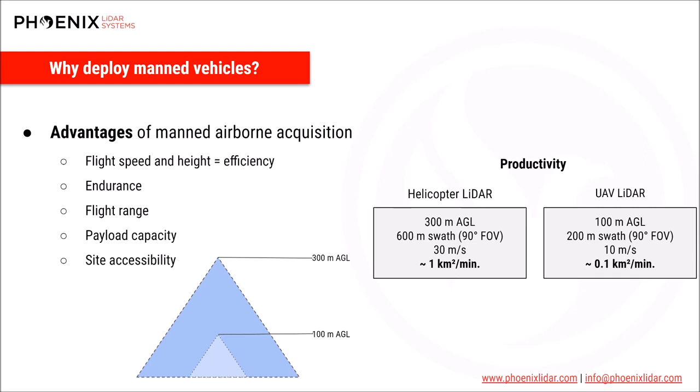But we also need to realize that there's an increased operational cost, and that creates a type of a risk versus reward situation that we need to feel confident about. Acquiring the correct data on your first try is increasingly important when the cost to perform a refly goes up. And because of this, there are some special considerations when planning for data acquisition. These considerations aren't necessarily unique to manned acquisition, but in some cases, they're more significant for this particular application.

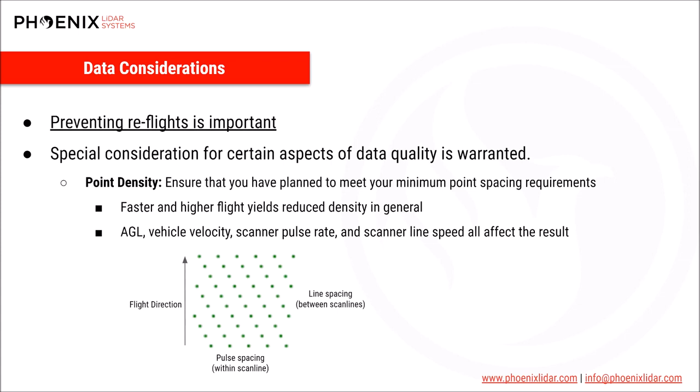First of all, there's point density, and this is a standard project spec that frankly needs to be met. Often it only really becomes a serious planning consideration when we're flying at manned vehicle AGLs or speeds. From a UAS, for example, the data is often so dense that we don't even think about point spacing as an obstacle. And that's not the case when you're flying hundreds of meters above the ground. Collecting with improper settings from these survey speeds and heights could easily result in the need to remobilize and redo a project. And that's definitely something that we don't want to happen.

Other considerations include range capability. When scanning at longer distances, we must ensure that the pulse energy is great enough to measure its target. So users need to be aware of the settings they're choosing, like pulse repetition rate, and check that they're compatible with the intended measurement distances.

Maintaining proper overlap for LiDAR and imagery is another aspect of well-planned data acquisition. As a vehicle travels across areas of significant terrain relief, the footprint and resolution of your acquired data can change dramatically. This can cause two issues. Either number one, you're suddenly too high above the target and not capturing the proper resolution, or number two, you're too near the target and your forward and side overlap are minimized below what you were intending. Usually a terrain following flight path can mitigate this type of obstacle.

Finally, when the time of flight for a LiDAR pulse is greater than the time between consecutive pulses, there can be multiple shots in the air simultaneously. This can cause an ambiguity as to which emitted pulse the return belongs to.

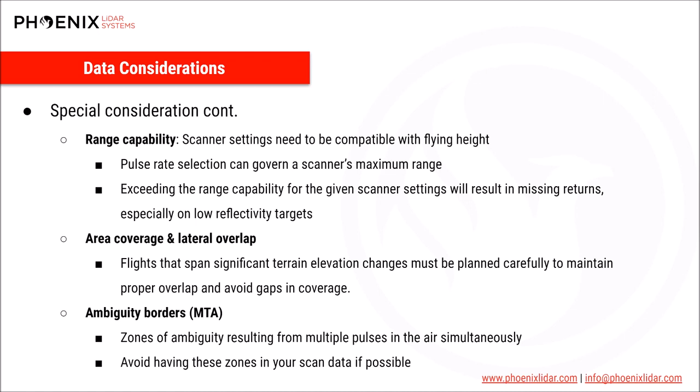Keeping in mind that there are multiple data quality considerations that are an important aspect of a successfully executed acquisition, it's clear that a well-designed flight plan is a critical piece of the overall mission. So next, let's take a look at the process of creating a flight plan.

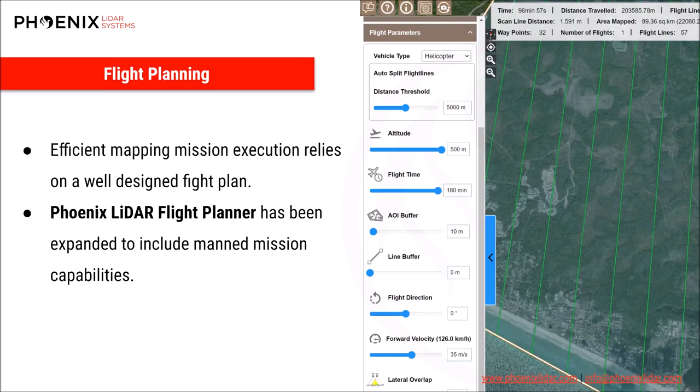Current users of Phoenix systems have had access to our UAV flight planner for a few years. Now that flight planner has been expanded to include options that are useful for missions from a variety of vehicles. We're pretty excited to offer this homegrown option, so let's dive into the key functionality. Oops.

The PLS flight planner has 3 different mission type modes that are applicable for different scenarios. First, we have the wide area mapping mode. This mode is not new to Flight Planner, but there have been some alterations that are conducive to following discrete lines instead of the waypoint following UAV-oriented output that previously existed.

Then there's the corridor mapping mode, which is useful for planning linear areas of interest like utility corridors, for example. And finally, a new type, which is line points mode. This is used for planning complex paths like boresight calibration patterns.

These missions can be built using imported KML areas of interest, or they can be built from AOIs that are digitized directly in the flight planner. We've also added the ability to save missions to our server and to have multiple missions, possibly of varying types, even open in a single project. So for example, if you plan a wide area acquisition and also want to perform calibration during the same flight, that's pretty easily achieved.

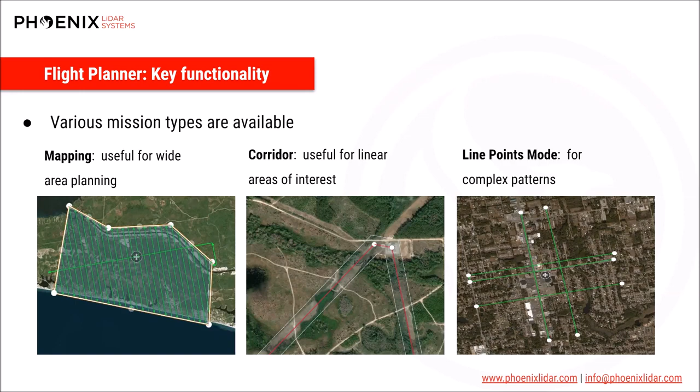In order to plan appropriately, the flight planner has a variety of sensor types that can be added to a mission and specific sensor models that are available. So you can plan a mission that includes a LiDAR plus a camera or plus multiple cameras at the same time. With the specific sensor models, we can choose which settings to use, and the flight plan output will be estimated based on those settings. This sensor-specific criteria allows accurate planning for key aspects like density, overlap, resolution, etc.

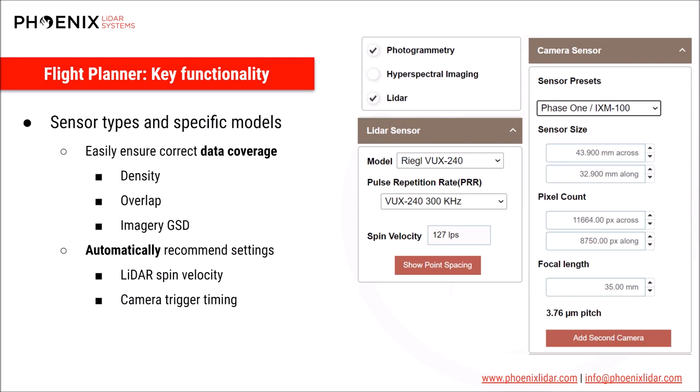The parameters which control how your flight plan will be automatically designed are very visible and they're in your control. Toggling these is quick, and so you can easily fine-tune things to reach your desired outcome. There are some straightforward parameters like, for example, would you like to terrain follow or not? What speed and altitude would you like to use? What's your usable field of view, etc. These are the more foundational settings.

There are also some ways to customize for efficiency and quality, like setting flight direction to best suit your AOI, or to create north-south only passes to optimize image quality based on illumination conditions.

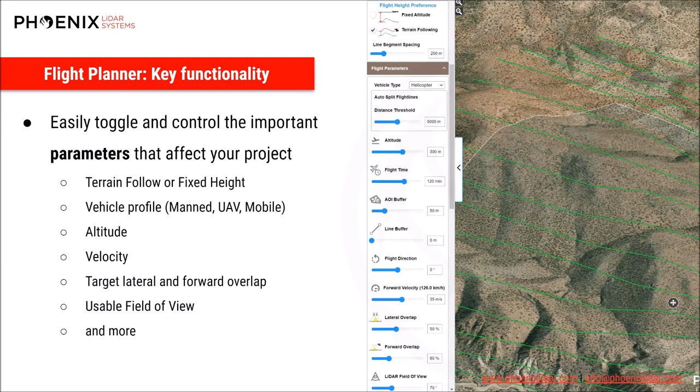Once your parameters are set, the flight plan can give both visual and statistical results for your quality control. The visual results are various map layers, including generated flight lines, point density estimates, MTA zone borders, image resolution, and other clues to help you know if the plan is what you need.

The statistical output will show you interesting properties of the LiDAR like point spacing and swath widths. You'll get estimates of camera output, and you'll also get properties of the flight itself, such as duration, distance traveled, and line spacing.

If adjustments are needed, you just toggle the previously discussed parameters or make changes to the scanner settings and recompute the plan. Really, the purpose of these visual and statistical results is to ensure that you have the right plan for a successful mission.

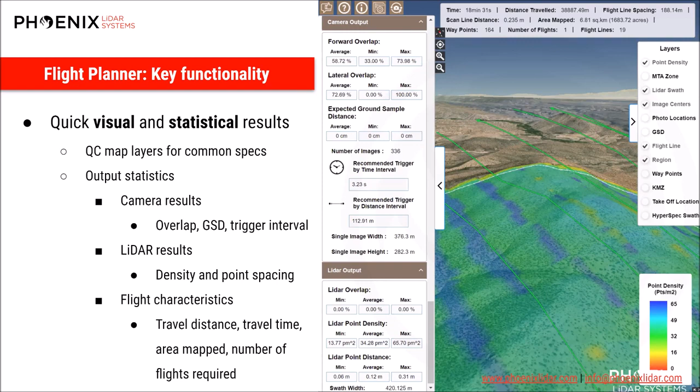The final step is to output your results. There are outputs that are compatible with a few different flight controllers. The one that we're particularly interested in for manned aerial acquisition is the Spatial Explorer output. This will generate a plan that can be used directly in the new real-time mission guidance functionality of SE. So let's move into that section of the webinar as I hand the mic over to Ben.

Thank you, Conrad. Can you hear me? Loud and clear. Cool.

Yeah, so now that we know why we would create a flight plan and how to create it, I'd like to show you how to use that in the field. And I thought to introduce mission guidance, which is the new part of Spatial Explorer, a 15-minute demo would be much more helpful than slides. So let me try and share my screen here and demonstrate this. 1 second.

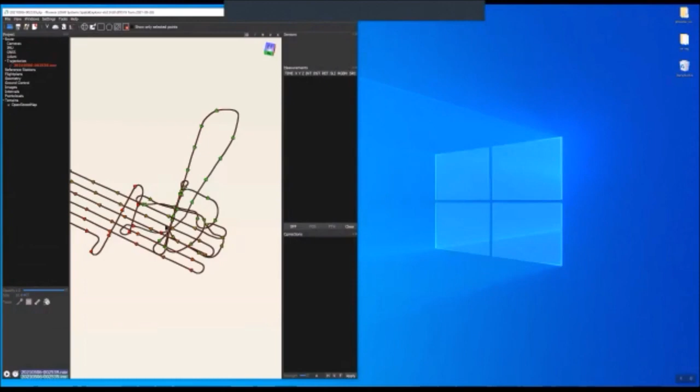Now, this flight was flown in an R44, and you can see here we're taking off, gaining some height, then we're moving over to a calibration pattern here. So there's some lines flown here at 2 different altitudes, and then we're moving over to a mapping pattern. And if we zoom out a bit, we can see that this was flown just north of Austin at the Georgetown Municipal Airport.

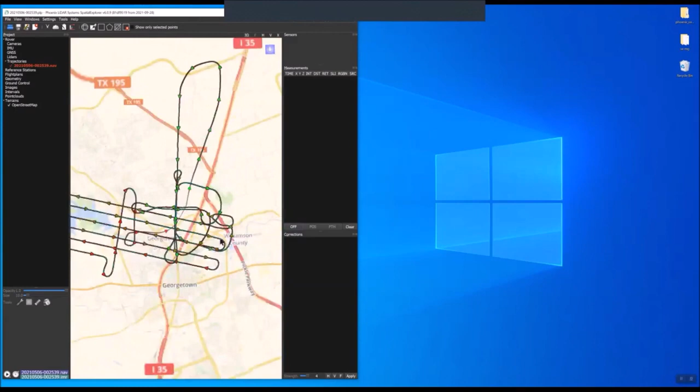And yeah, I want to focus on the mapping part of this. So first of all, I'll start playing this at right around real-time speeds. And because I know the navigation system is going to initialize the first couple of minutes, I'll just jump ahead to maybe a more interesting part. But in the end, once you're connected to rover, even if the navigation system is still, say, aligning or initializing, you can already start mission guidance.

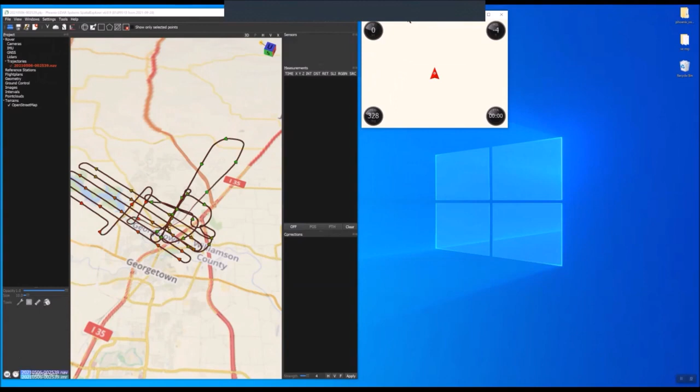And of course, in practice in the field, you would be moving this window to the pilot screen, which would be connected to your laptop via HDMI. So the left side would be for the sensor operator and the right side would be for the pilot. You can already see this is us. Here's the current velocity, our current height above ground, a heading, and an estimate of when the flight plan is complete. Of course, right now we don't have a flight plan loaded, so this is kind of useless right now.

But if we seek ahead here a little bit, we can already see ourselves moving. And what you see here is what we call the dynamic whisker. So this gives you a good idea of your current curvature, and if you keep flying with this curvature, where you're going to end up in the future. Let me close this here and this.

Okay, so the idea, of course, is to fly with a flight plan. So let me load that. This file was created using our Phoenix LiDAR flight planner. So I'll just open that, and really you can just open any KML. All we need to know is, since KML files can have folders, from which folder to import the geometry, and you can select multiple, but really all we want here is the flight lines, and we want to limit this to line strings. So really just paths, not polygons or points, just lines.

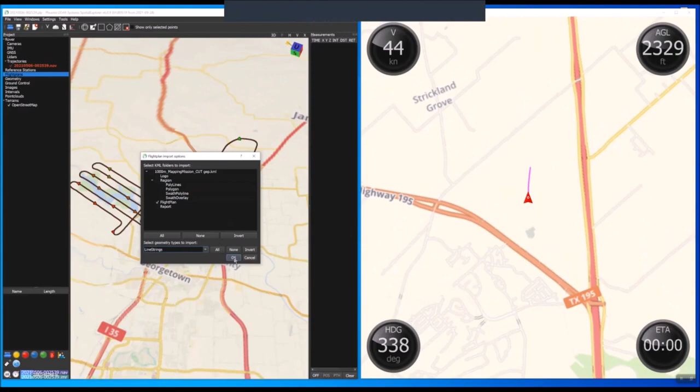So I'll just press OK, and immediately we'll have, in this case, 10 flight lines in here, and they show up in the operator view in 3D, and they also show up here for the pilot. Now, in terms of flight plans, you can load multiple flight plans, which will show up here. And each flight plan consists of any number of flight lines. Flight lines can have a status. Here you can see after loading they're all blue, which means that they are incomplete.

You can schedule a flight line, in which case it'll turn yellow, so you use the yellow button for that. And then that tells the pilot to please approach this flight line because it's going to be mapped next. When the pilot gets close enough to one of the endpoints of it, it'll switch into recording mode, or active mode, which is red. And when the pilot did a good job and passed that line, it'll turn to green. So the idea is that blue will slowly turn to green over time.

Now, before we go there, let's focus on this part here. I would like to draw your attention to this flight plan because it has a couple cosmetic issues here. You can see the flight line not really being very smooth. So it is terrain following, but something is up there.

Now, as you can already see here, Spatial Explorer has a model of ground. And we want to use that to fix up this flight plan. So even though there already is a model of ground, we have some additional flexibility in allowing different height maps to be used for this.

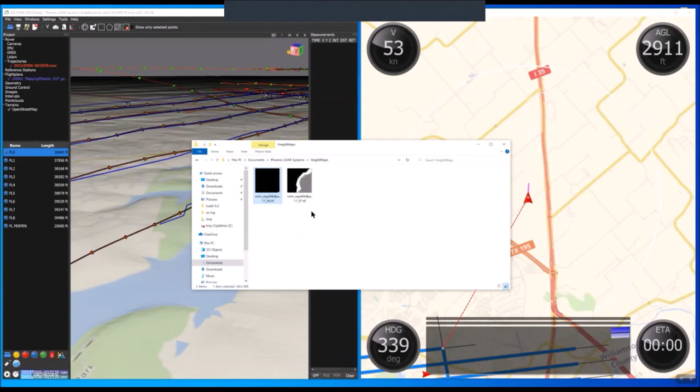In the end, those height maps are going to have to go into this folder, so Documents, Phoenix LiDAR Systems, and Height Maps. And I'll really only be needing this one, but yeah, I can add as many as I want to. Once I have that, I can come back to my flight plan here, and I can go and recompute the altitude, and it'll remind me that it'll need height maps in this folder. I'll say OK, and then I'll tell it to reflow those flight lines 3,300 feet above ground.

And when I say OK, it'll say, OK, I recomputed 5,000-ish positions, and none of them were not covered by height maps, so that's good. Once I press OK, you can now see the flight lines are much smoother and following ground much better. Of course, if this were a UAV mission, you could go and just set this to 400 feet, and it would land down here.

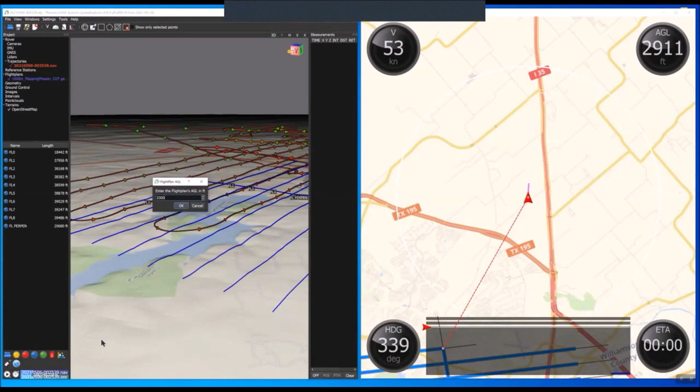Now, if you're happy with the shape of the flight lines, just not their absolute altitude, you could also go in here and just apply an offset. So I just said 400, it was 3,300. So if I add another 2,900 feet on top of it, I should be back to where I started. And then, of course, you can also go back and undo this and recompute them to 3,300 feet, and I would be back up here.

So this isn't just helpful when importing flight plans from other programs shows up with issues, and we've seen mismatches from, say, EGM 96 to WGS 84, or even units being incorrect, or just downright heights of 0 being exported. So I would recommend that you have some height maps ready just in case.

We also had missions where, for example, cloud cover prevented us from flying at the altitude that we wanted to fly. So it's quite handy to be able to change this before or even in flight.

Okay, so to keep this video short, I want to go ahead and go to the beginning of, say, flight line number 1, and I do want to fly this flight line first, but really in terms of the flight plan, flight line 0 is first. Now maybe that's a flight line that I really don't want to fly, and I can rename this, for example, to be named unused, and I can select one or multiple flight lines and just move them around using drag and drop operation.

For example, I could move this to the end of the flight plan, so that I would only fly this if we have fuel left. Or sometimes you can have air traffic forcing you to make changes to the flight plan because maybe you can't fly flight line 7 and 8 right now, so you'll just move them to the end of the flight plan, and so on. So that way you can just pick a couple flight lines and move them to any place that you like. It's not going to change their status. Once they're complete, they're complete.

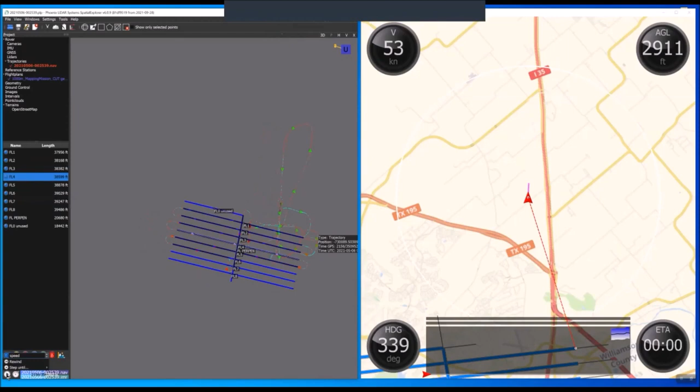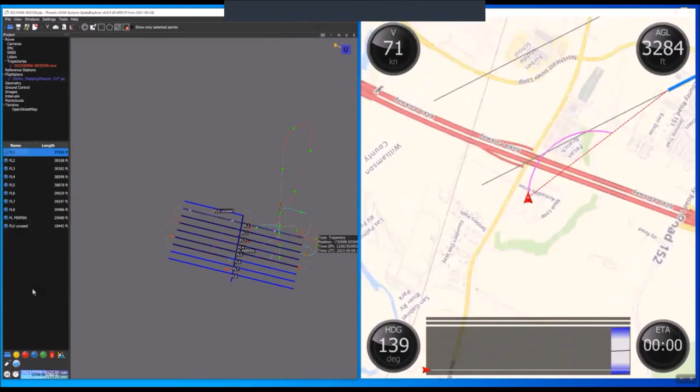Now, if I jump to this point in time, and I'll start playing this back like this, you'll see that mission guidance directs the pilot to the first incomplete flight line, which now is flight line 1. You can also uncheck this here to remove some clutter. And we see the pilot making his way to this, but the flight line isn't scheduled yet.

So it's already selected, so I'll just hit the yellow button, and then you'll see the pilot approaching that, and we see the flight line itself, which is now yellow, as well as a corridor, like a horizontal tolerance around it. And so long as the pilot hits that horizontal tolerance and also hits the vertical tolerance here, the flight line is going to switch to active or recording, so it should turn red.

Okay, so now we're on the flight line and the yellow line switched to red, and we know we're recording, and we actually see how the pilot is navigating here, both horizontally and vertically. There's a slim line here at the top that shows you your progress along the current flight line, and there's another slim line that shows you your progress along the flight plan.

And once you're on a flight line, this estimated time remaining also makes a bit more sense. Of course, it's just an estimate, but it gives you a rough idea, and pilots really like it for planning their fuel, essentially, if they do need to land and fuel up or not. Now, to keep this short, I'm going to jump towards the end of this flight line, so right here.

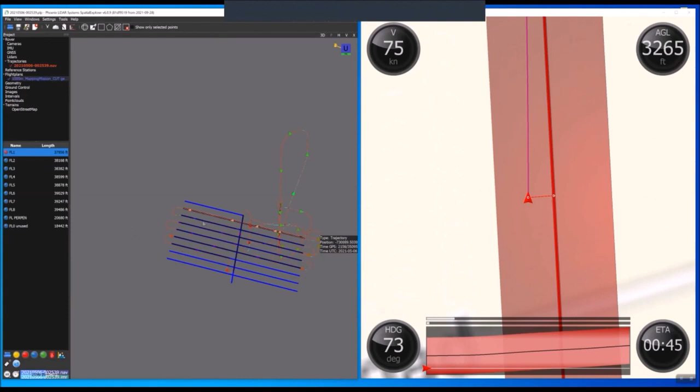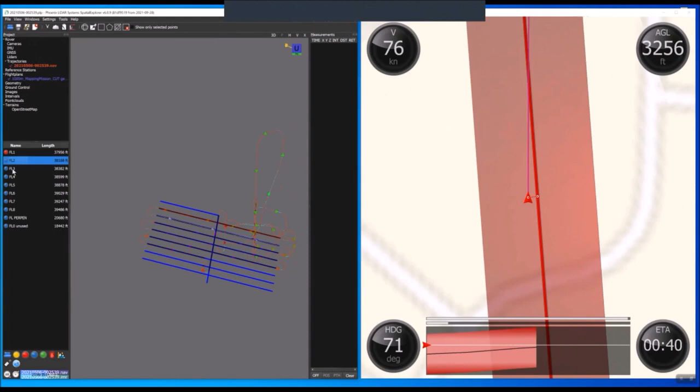And I'll jump over here, and now you can see the flight line progress being much further, the flight plan progress also being a little further, and we should see the end of the flight line coming up also in this vertical view. And once that happens, of course, we have no flight line scheduled here, right? They're all incomplete. And then mission guidance is smart enough to just pick the next incomplete flight line, which is flight line 2. And you'll see the view immediately changing.

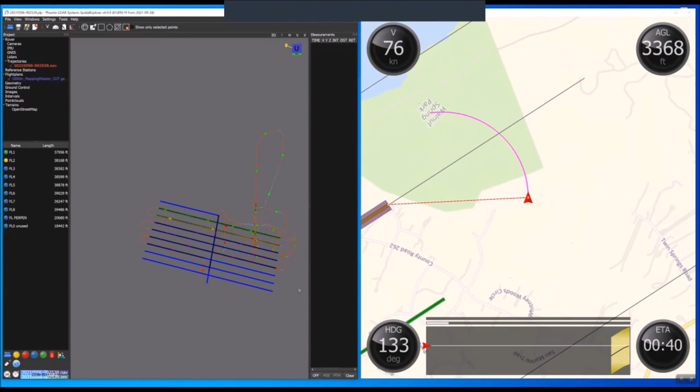It always takes care that the point of interest, in this case the beginning of the next flight line, is always in view. So no matter where you fly, no matter which way you turn, you'll always see that point. And again, we can see how you can use the dynamic whisker to pre-align with the flight line. Pilot is actually not doing the greatest job of that right now, but yeah, this was the pilot's first flight with mission guidance.

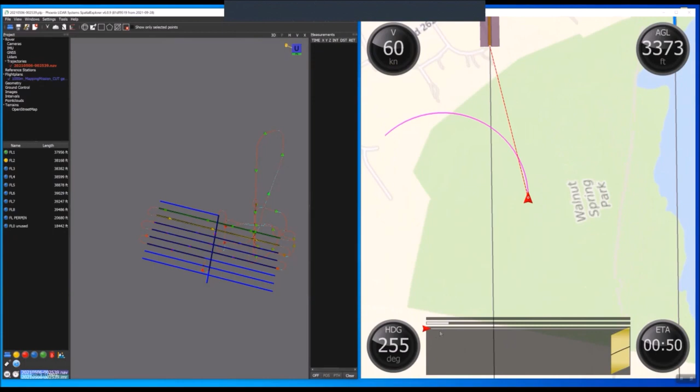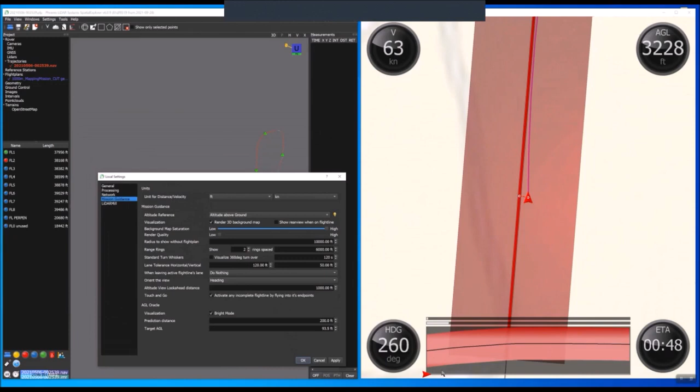Now, looking at this, I can see that the pilot is actually flying too high. So right now he's still a little bit above the flight line's height plus tolerance, but now he's making his way into the corridor. Now we can open settings and mission guidance, and we'll see that the pilot just hit the corridor, but is now actually flying below that corridor. So let me go through some options here.

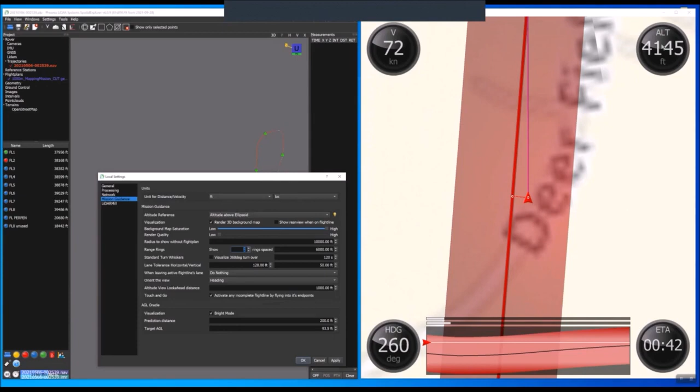First, at the top, we see units for distance and velocity, and those are the units that are shown here, knots and feet. Then we see our altitude reference. Right now we're using altitude above ground, and that works because we have a height map. If we didn't, it would show an error here. We can also select altitude above ellipsoid, but that's usually not what we want. So I'll switch this back to above ground level.

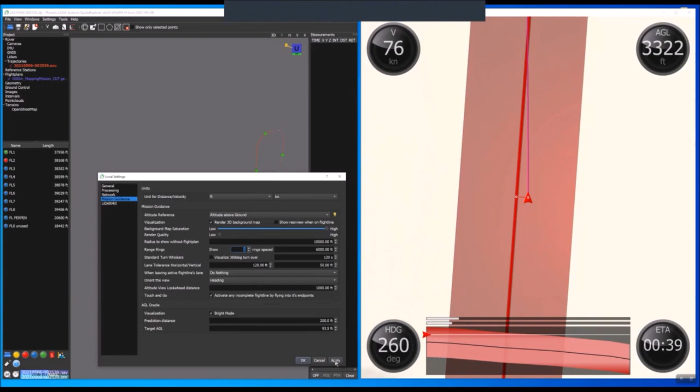We can select to not show a background map, but usually pilots prefer to have some context about where they're flying right now. Also, sometimes pilots tend to get a little distracted with the map, just visually distracted. So we added an option to just desaturate the map, because it's not really that interesting what the name of the street you're flying over is. It's more to give you some visual of whether you're above the water or where you're flying, so you can orient yourself on upcoming buildings maybe.

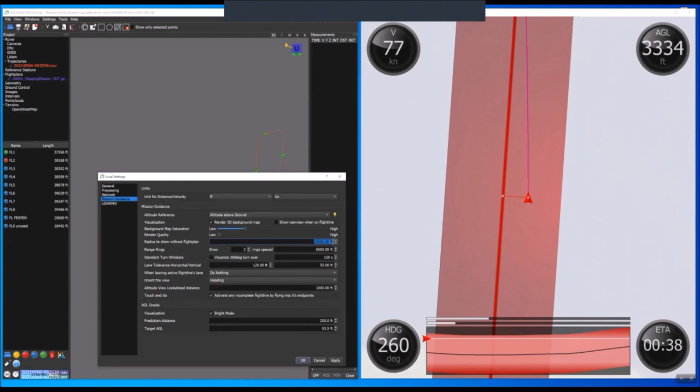Render quality can be changed, so this is multi-sampling and some other settings, and it really doesn't make that big of a difference. This setting is if there is no flight plan loaded, like at the beginning of this video, then how much area do you want shown around the vehicle? In this case, it would be 10,000 feet.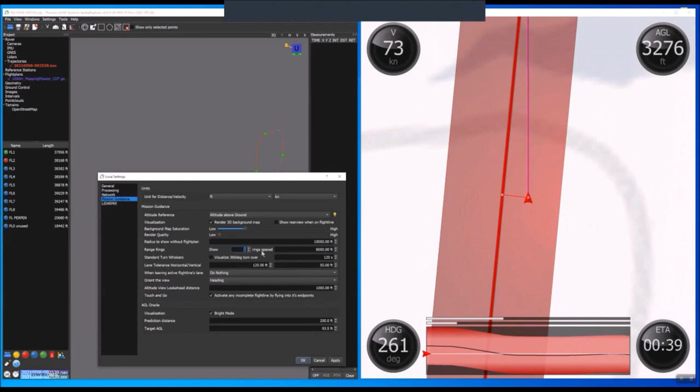The next one is for pilots that like to show what we call the range rings. So some pilots like rings 5 and 10 nautical miles around their aircraft to give them an idea of when they will reach what part of the map. You don't see this here right now because they're spaced 6,000 feet. If we space them, say 60 feet, you'll see them in here.

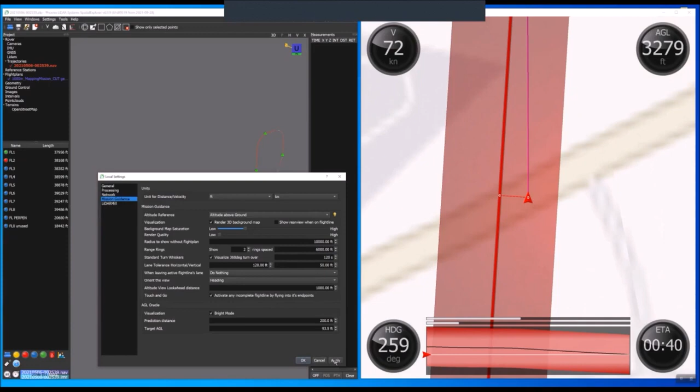If you like, you can show not just the dynamic whiskers, so this pink line, but you can also show static whiskers, and you can configure their curvature. So right now they're set for a standard turn of 120 seconds.

More importantly, or most importantly, you can configure the horizontal and vertical tolerance of this corridor. So right now we have a tolerance of 120 feet to either side, and a vertical tolerance of 50 feet, which our pilot is sometimes violating. So let me increase this to 100 feet, and you'll see that this corridor has now become much higher, and we're well within that tolerance now.

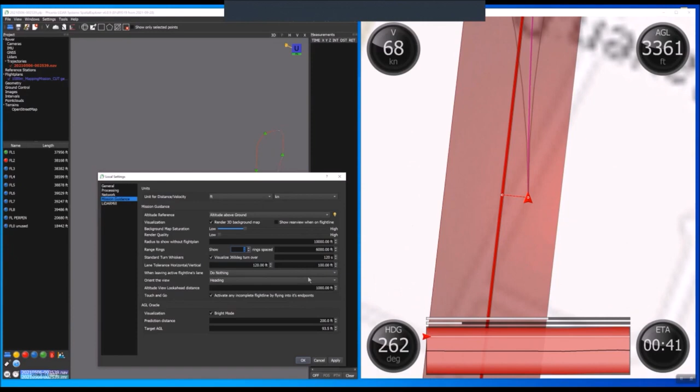Now, when you set those tolerances, the question is really, what's the point? So if you set a corridor and the pilot leaves that corridor, does nothing happen? Because all you want to do with that is set some expectations of precision, in which case you would leave this at do nothing. But if you want something to happen when the pilot does leave the corridor, you would select a different entry here.

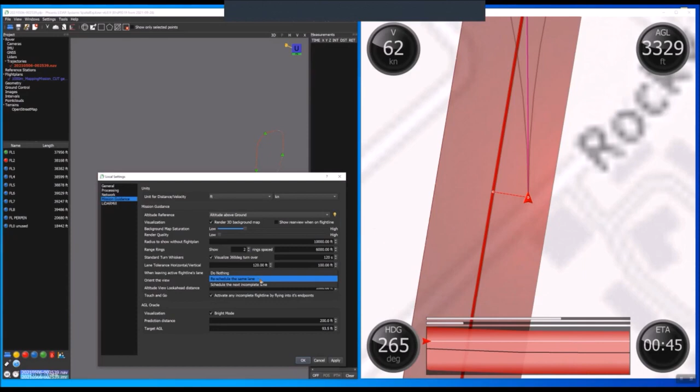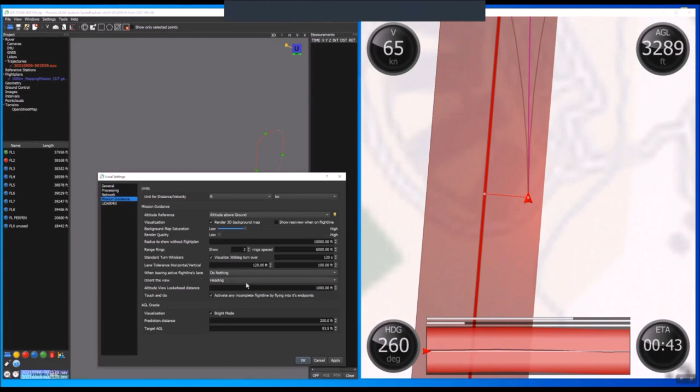So for example, once you leave that corridor, you could reschedule the same flight line. So it would be reset to blue, incomplete, and would have to be reflown. Or you can have it reset to incomplete and schedule the next incomplete lane. In this case, that would be flight line 3. I'll leave this right here, but yeah, this is configurable. Right now, the view is oriented so that the vehicle always faces up, and you can change this.

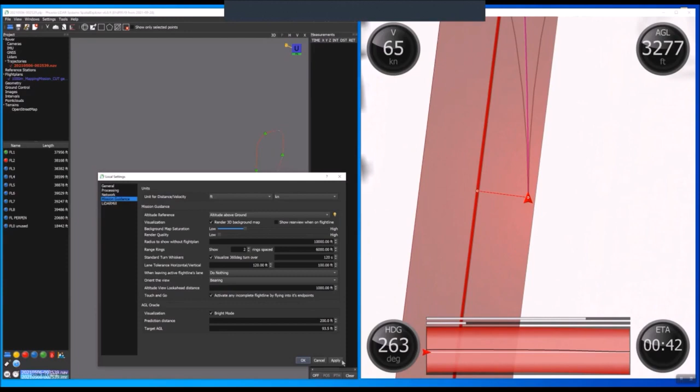For example, here to bearing, because we can see that the flight line itself isn't really oriented straight up, and that's because we have some crosswind, so we have some crabbing going on. So the vehicle's orientation doesn't quite match the vehicle's direction of motion. And if I change this, then we now orient the view according to the vehicle's direction of motion, and you'll see that the heading is actually a little bit off. The vehicle doesn't really look upwards, but slightly tilted to the left. Most of the time that's a really small difference, but some pilots have a really strong opinion on that.

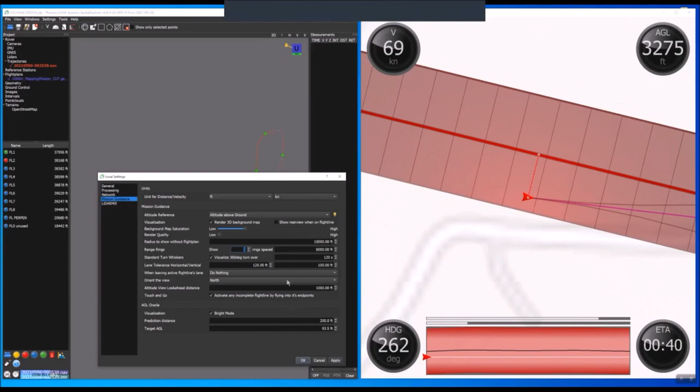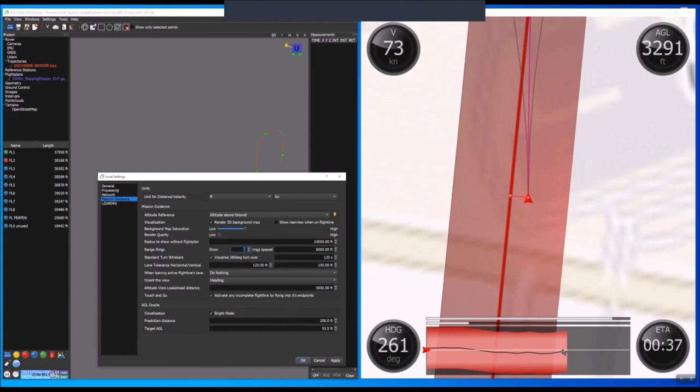You can also switch it to always be oriented north, but usually I would recommend you leave this at heading. These 1,000 feet are the look ahead distance for the vertical view, so that's this box down here, and right now we are looking 1,000 feet into the future. So we can of course change this, for example, to 5,000 feet, and then we'll see the end of the flight line coming up a little sooner. If you're not seeing the end of the flight line in here, you can still see it there.

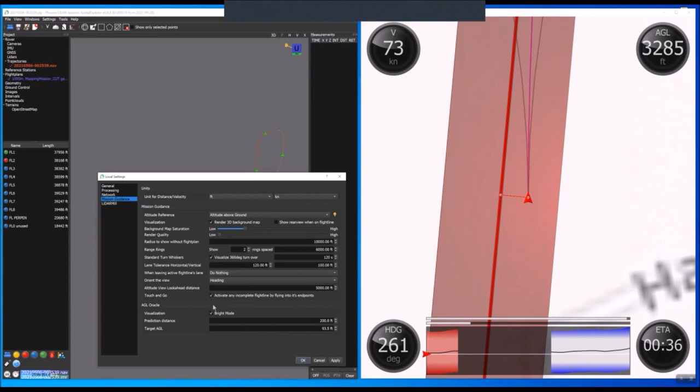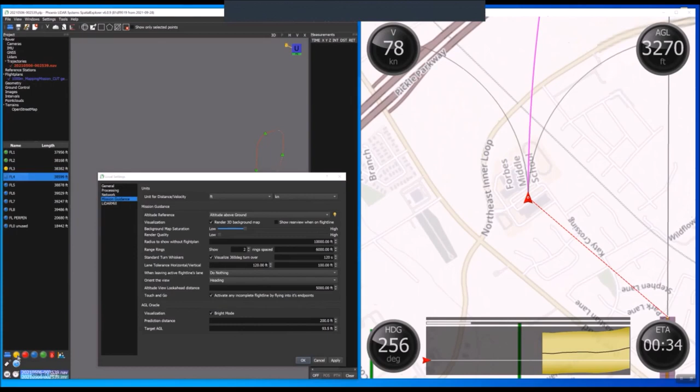Now, the last option here of mission guidance is what we call touch and go, and that's actually slightly more advanced, with the idea being that the operator doesn't always have to schedule and dictate lines. We can just have the pilot do that. So we know the pilot is going to approach this flight line because this is a flight of the past, of course. But I could technically, just as an example here, have flight line 4 next and have it auto scheduled. Yet with touch and go mode enabled, the pilot just has to touch the beginning or end of a flight line within tolerance to start it off.

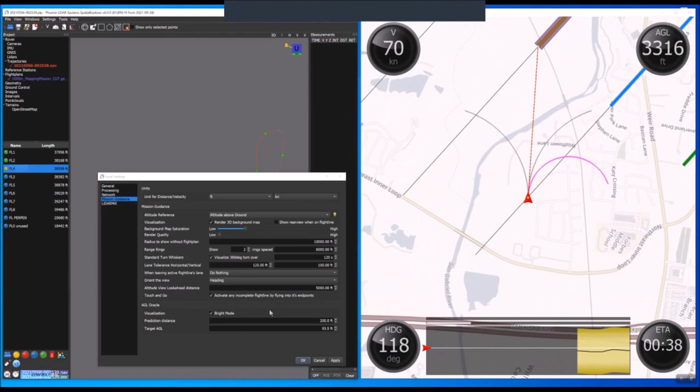So even though this flight line is scheduled, the pilot is free to still start this flight line just by flying into it. So now the pilot flew into the beginning zone of that flight line, and it automatically activated only because this option was active. If I remove this now, of course, we're not going to deactivate the flight line. So that's pretty much mission guidance.

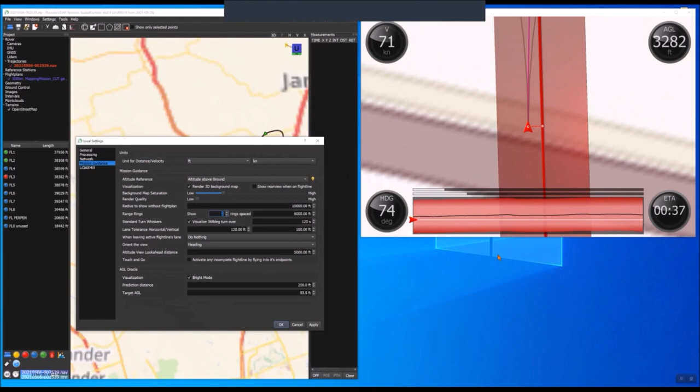I do want to make a small jump to AGL Oracle, and that's the section down here. So we had a couple customers that said, well, horizontal mission guidance is great and all, but really we're flying a corridor, a power line, a pipeline, and really we can see what we're flying over. So we don't need horizontal guidance, and we don't want to create a flight plan. But what we do need is to keep our height above ground, because maybe it's something scan range related. Maybe we don't want an MTA zone border to be on the geometry that we're supposed to scan. So really we're just interested in height.

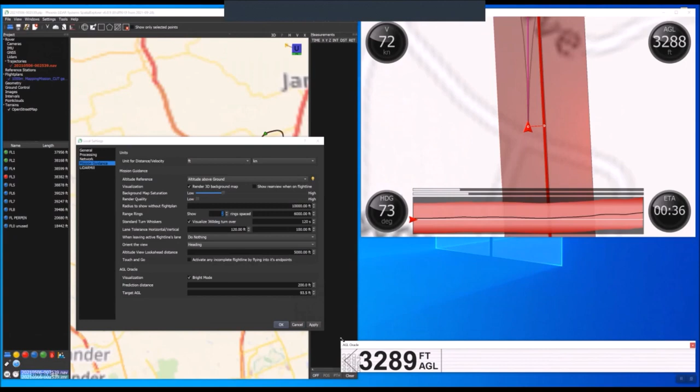So that's what we created AGL Oracle for, and I will quickly move this over here. So this can also go to the pilot display, and it's really completely independent of mission guidance. So you can close mission guidance and not use it, or you can, totally up to you. So this window shows essentially just your altitude. Let's set this up and say we want to fly 3,300 feet AGL, and we want to have a look ahead of 5,000 feet.

What that means is Spatial Explorer is now going to use its height model. So again, it needs a height map, and draws a line at 3,300 feet AGL, and it shows you where you are right now at 3,277. So you need to be flying 22 feet higher than what you're currently flying. So it's kind of comparable to the vertical view here, but this one, of course, is attached to a flight line, whereas this doesn't need a flight line and just works relative to ground.

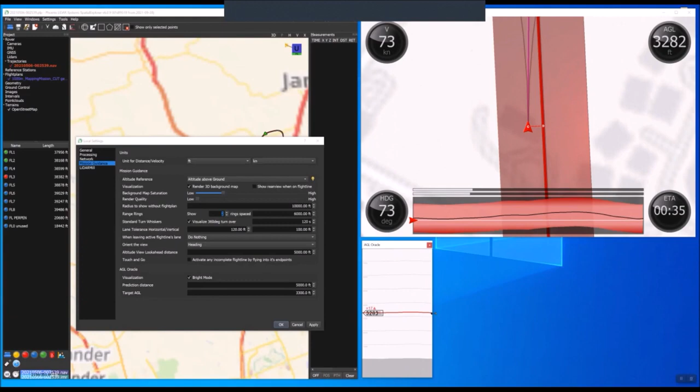In fact, if you just scale it right, you may even be able to see ground down here. And as the vehicle turns, of course, you'll see the ground model change. So this is a real-time prediction of how ground is going to flow right ahead of you.

All right, so let's go back to the slides. Conrad, could you share them? Thank you.

Okay, so that's the how. And we've had Troy Ballard of Phantom Aerial Solutions beta test this and give us some feedback. And he kindly, thank you, Troy, I think you're listening here as well, allowed us to share some results.

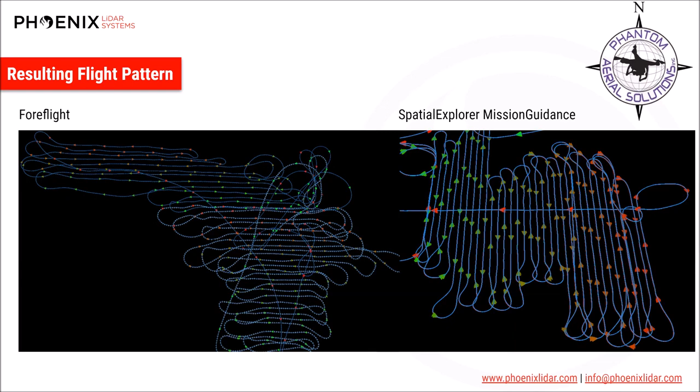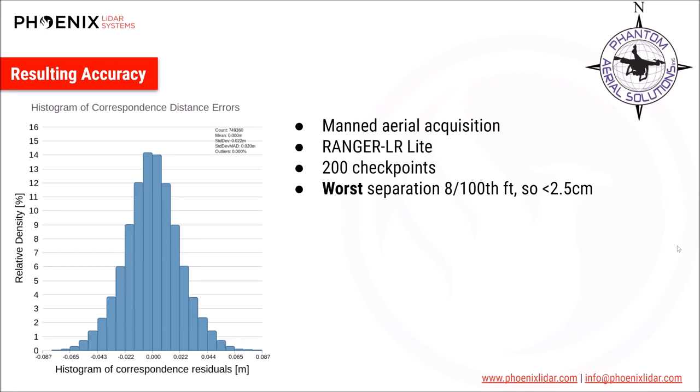And according to Troy, in terms of absolute accuracy, the worst separation to 200 checkpoints was less than 2.5 centimeters. So that's an example of mission guidance helping both in the field as well as in post-processing.

So summing up the benefits, you have the peace of mind that you won't have any gaps, you won't have to refly. It's always easy to plan flights, but once you're sitting in, say, an R44 with 3 people, crowded in the back, the sun shining on your displays, you really need something intuitive, something that works, and something that guides the pilot. Pointing your finger at some house at the horizon saying go there, that just never works. So we're quite happy to see this working.

As far as initial feedback, we're hearing that pilots pick it up quite quickly because it's very visual and very intuitive. Pilots tend to develop this code of honor to really stay close to the flight line, and you can see quite the difference, and it becomes a bit of a sport for them to really do well on those flight lines.

And usually you start with a corridor tolerance of, I don't know, 50, 100 feet, and you realize you don't even need that much. Even on windy days, you get more crabbing, which can be an issue as well, but usually they stick to the flight lines quite well.

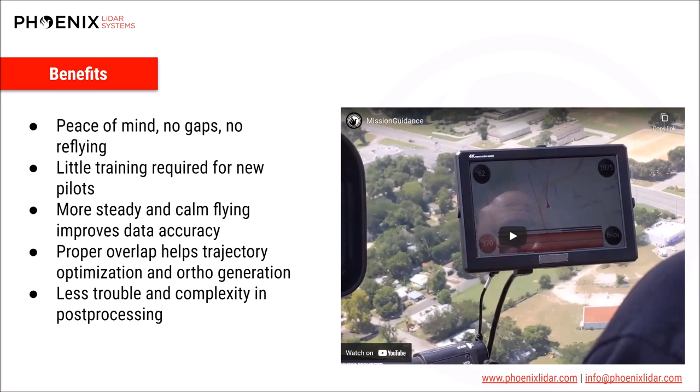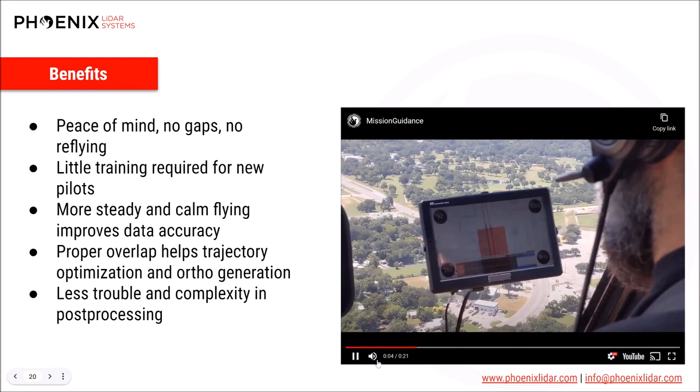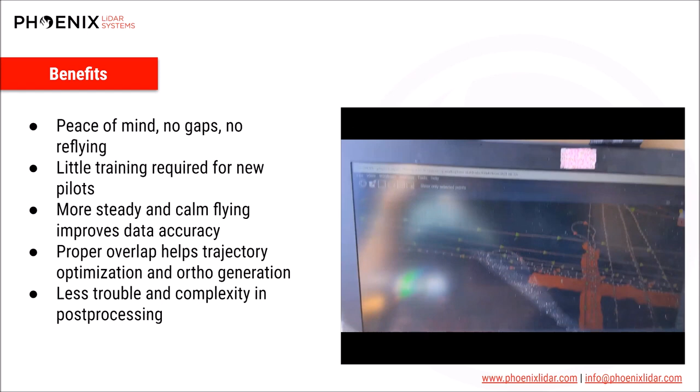And on the right, Conrad, if you can click that video, that's just a short impression of one of our test flights. So that was in the helicopter. I think this was in an R44. You can see him just finishing a flight line and jumping over immediately to the neighboring one. I think this was a bore sighting flight.